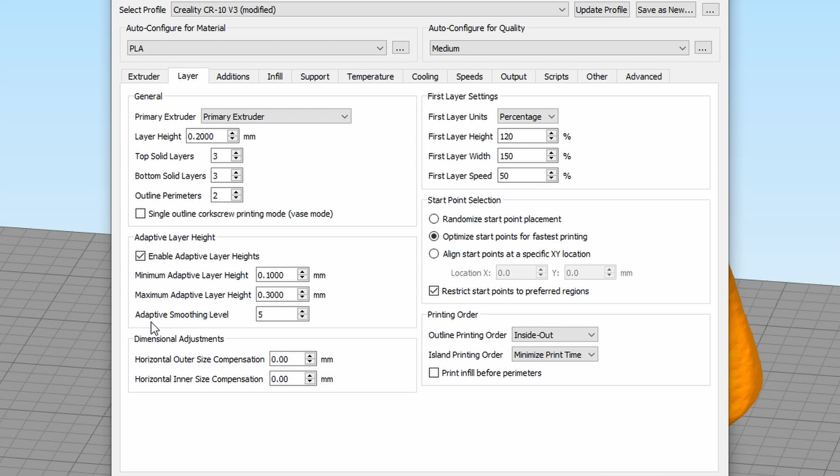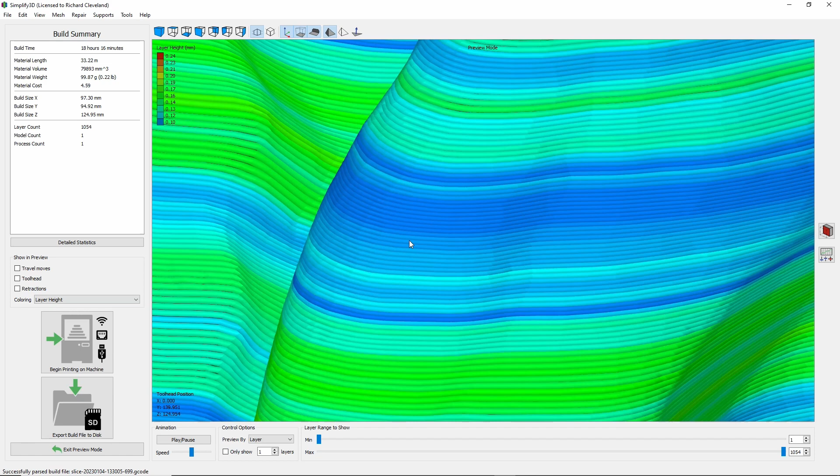One of the benefits of adaptive layer height is that it can help users achieve a higher level of detail in their prints without increasing the print time. It can also help to improve the surface finish of the model, as using a finer layer height can result in a smoother surface. Overall, the adaptive layer height feature in Simplify3D version 5 can be a useful tool for users who want to achieve the highest possible print quality while minimizing print time.

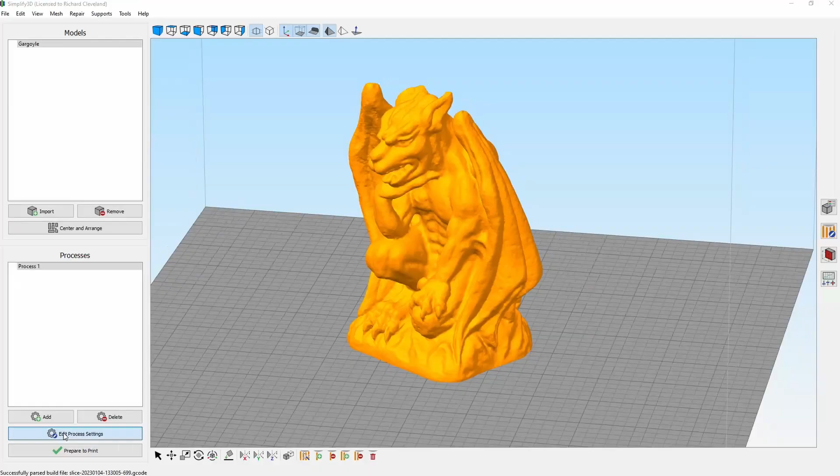Automated seam hiding is a feature that allows users to automatically hide the seam that's created when printing a model. This can be useful for creating a more seamless and professional looking finish on single or multicolor and multi-material prints. You need to enable it in the print settings and specify the location and appearance of the seam. Simplify3D will then automatically generate the necessary toolpaths to hide the seam during the printing process.

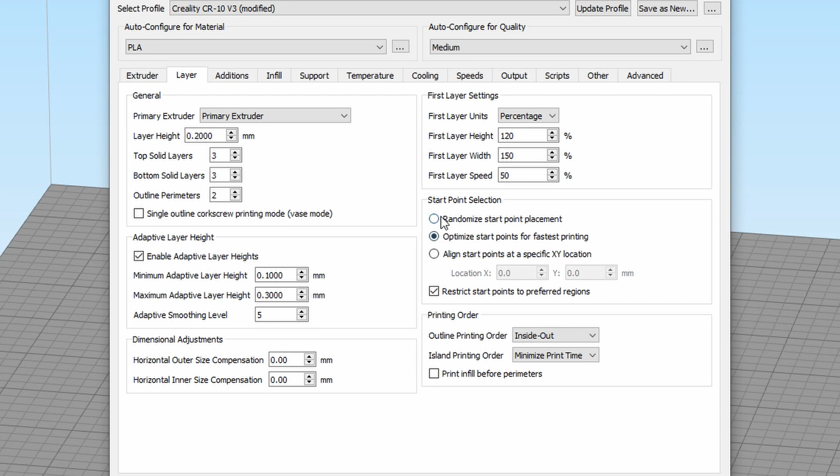One of the benefits of automated seam hiding is that it can save users time and effort by eliminating the need to manually hide the seam in post-processing. It can also help users achieve a more professional finish on the print without the need for advanced skills or specialized tools. Overall, the automated seam hiding feature in Simplify3D version 5 can be a useful tool for users who want to create high-quality, multicolor, or multi-material prints with minimal post-processing.

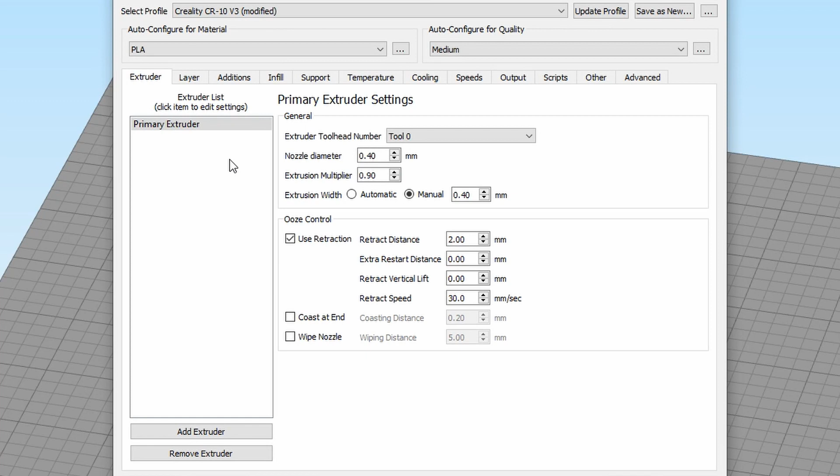3D infill patterns allow users to customize the internal structure of their 3D prints. Infill patterns can be used to add strength and stability to a print, as well as to reduce the amount of filament needed. Simplify3D version 5 includes a range of different 3D infill patterns that users can choose from, including honeycomb, triangle, and grid patterns. Users can also customize the density and orientation of the infill patterns to suit their specific needs.

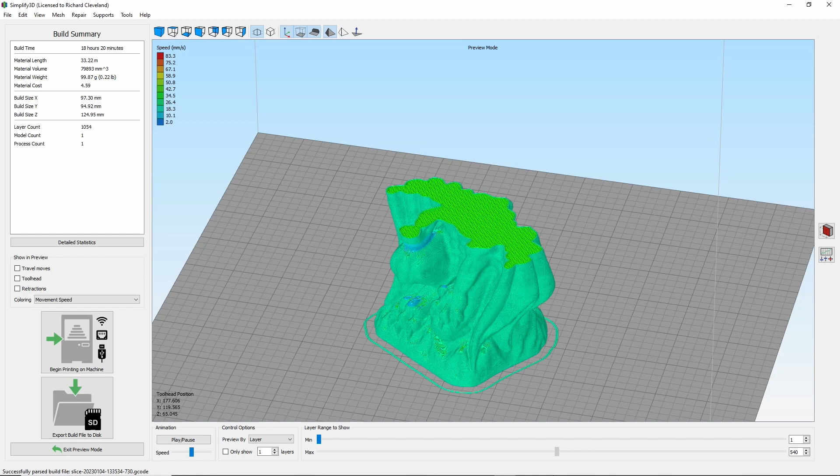The benefits of 3D infill patterns are that they can help you achieve a balance between print strength and print speed. By using a denser infill pattern, users can increase the strength of their prints, but at the cost of longer print times. On the other hand, using a less dense infill pattern can reduce print time, but may result in a weaker print.

Overall, the 3D infill pattern feature in Simplify3D can be a useful tool for users who want to customize the internal structure of their prints to suit their specific needs.

Dynamic infill density is a feature that allows you to automatically adjust the density of the infill in your 3D print. This can help users achieve a balance between print strength and print speed, as well as reduce the amount of filament needed. To use it, users simply enable it in the print settings and specify the minimum and maximum infill density they want to use.

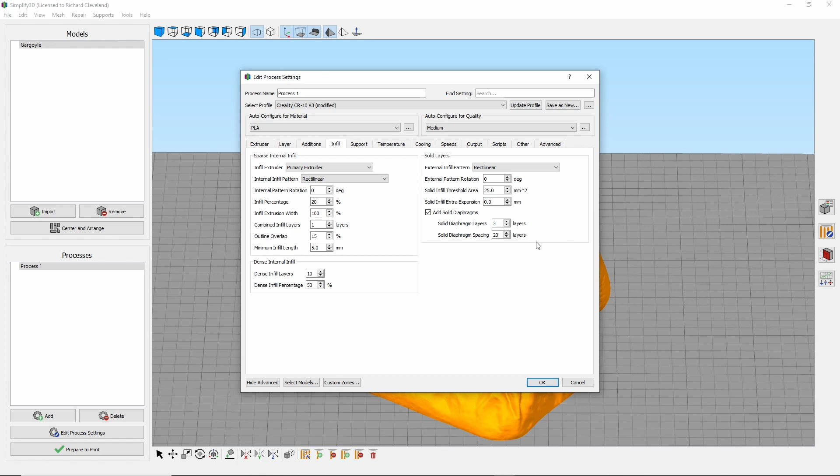Simplify3D will then automatically adjust the infill density based on the complexity of the model. One of the benefits of dynamic infill density is that it can help users optimize the internal structure of their prints to suit their specific needs. For example, users can use a dense infill in areas of the model that require more support, and a less dense infill in areas that don't require as much.

Overall, dynamic infill density can be a useful tool for users who want to achieve the best balance between print strength, print speed, and filament usage.

Here are some pros and cons of Simplify3D version 5. In the pros column, it's got an intuitive interface. What that means is Simplify3D has a user-friendly interface that's easy to navigate and understand, even for users who are new to 3D printing.

It has customization options as well. Simplify3D allows users to customize many aspects of the slicing process, including print quality, infill, support structures, and a whole lot more. It also includes advanced features such as automatic support generation, automatic bed leveling, and the ability to print multiple models at once.

On the compatibility side, Simplify3D is compatible with a wide range of 3D printers, including those from popular brands like MakerBot, Ultimaker, Lulzbot, and Creality, among others.

In the cons column, Simplify3D is a paid software, which may be a barrier for some users. While it's user-friendly, it does have a learning curve and may be overwhelming for users who are new to 3D printing. Lack of cloud integration is a big part of this as well.